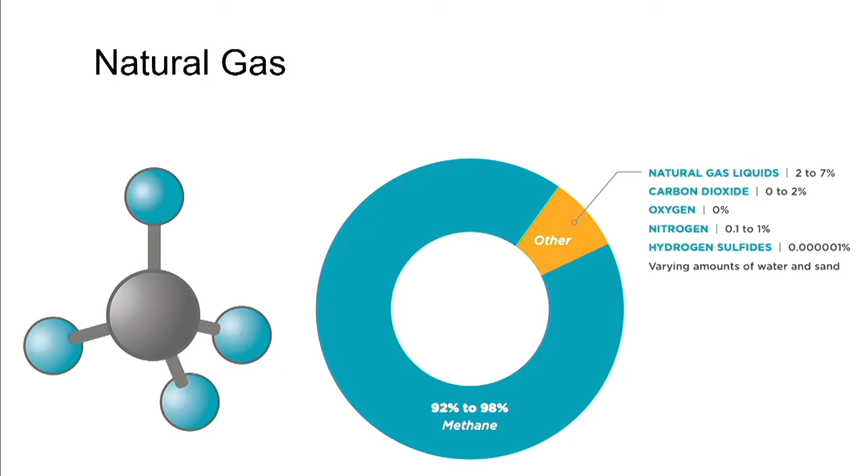So I want to talk to you about natural gas tonight. And increasingly, what I'm going to talk to you about is why building decarbonization is coming up now, and why gas is playing an increasingly important role in our conversation in California, and what are its implications for us as communities, and what we're going to be seeing coming down the pike as far as changes in the design of our communities and our energy systems.

So really, when we're talking about natural gas, the reason it's becoming more and more of a concern is that it's actually methane. Natural gas is made up of 92 to 98% methane. The rest of it is some other pollutants, some other additives, but ultimately what we're talking about is methane. And we're concerned about methane because methane is a super pollutant from a greenhouse gas perspective. 84 times more effective at capturing heat than CO2. So incredibly more effective than CO2 from a greenhouse gas perspective.

And the reason we're concerned about this is because California imports most of its natural gas. And we import it from states that have much different laws around air quality and water quality than what we have. And so anytime you have a leakage rate over 2% for natural gas, it completely negates any climate change benefit from using it as a fuel. Anytime you have a leakage rate over 3%, it doubles the climate change impact from that gas.

And so the Environmental Defense Fund hired the top infrared pilot company in the country, and they flew over 10,000 different well sites for the extraction of natural gas across the United States. And you're going to see some of the footage they filmed from the Barnett Shale in Texas, where we get about a quarter of our natural gas. And what you're going to see is something that looks like smoke coming out of storage tanks and extraction tanks. What this actually is, this is methane being released. Nick, it's all you.

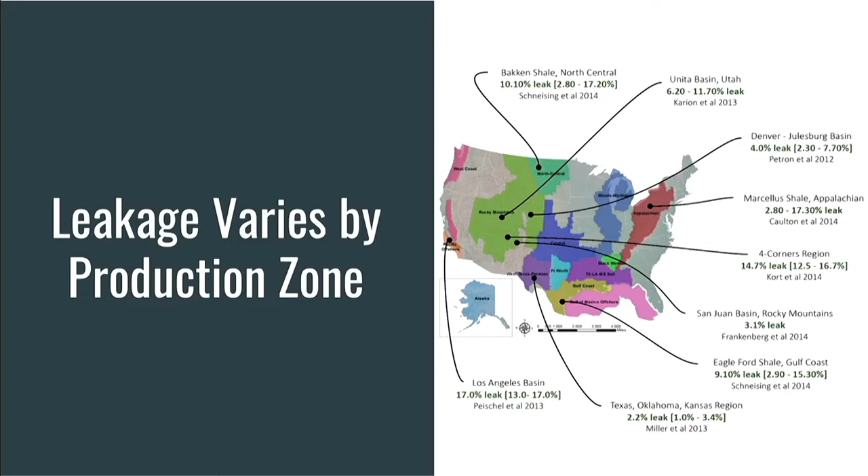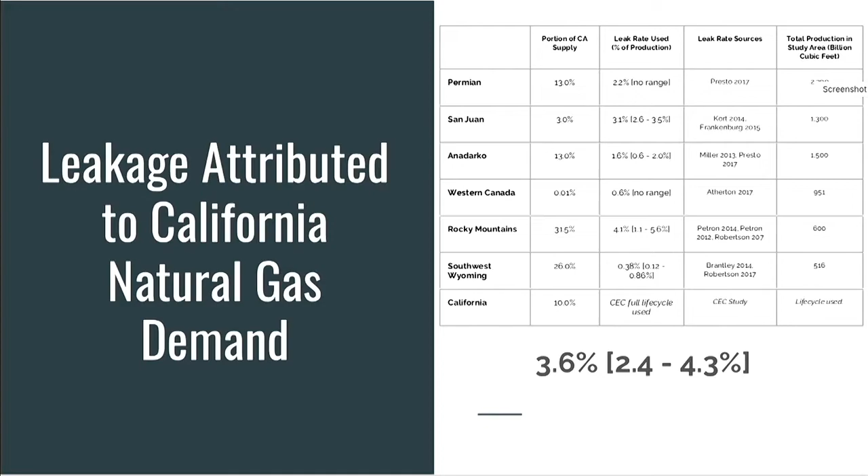Here is what it looks like from a California perspective. The first column on the left is all the different basins that California gets its natural gas from. The second column is what portion of California's supply comes from that basin. And then the average leakage rate as a percentage of overall production from that basin. Ultimately, the important thing is this. We have about a 3.6% leakage rate for the extraction and transmission to California for natural gas, meaning that not only does it have no climate benefit for its use compared to other fuels, but its impact is actually double due to the leakage of this fuel.

This is Jennifer. She works at Aclima. They're a fantastic company right down here in Silicon Valley, and that's a Google Street View car. And they put these air quality sensors in the back of Google Street View cars and drive them all over communities, making these beautiful maps of tragic information. And what they measure is different kinds of air quality pollution.

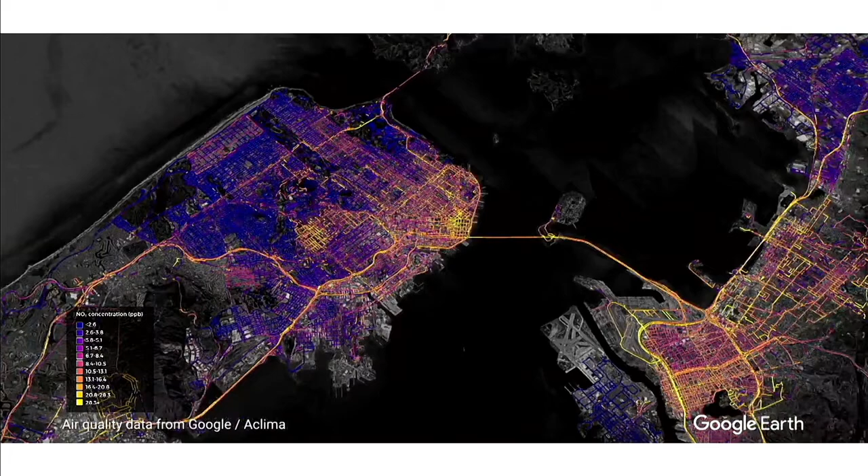And this is a map of transportation-related pollution, particularly nitrogen oxides in San Francisco, using these maps, driving around. I think this is about a year's worth of data that they captured, looking at different pollution levels. They also look at methane and methane release. So I talked a lot about where we get our methane from and how it gets over to us. We're starting to look more and more about the methane releases here in California.

And they drove around for about 6 months in Southern California. They picked 4 communities, and each one of these dots represents a leak in the gas system. And the little yellow dots mean it's the greenhouse gas equivalent of driving a car for 5,000 miles in one day. The orange dots are the equivalent of driving a car for 9,000 miles in one day. And the red dots, which is from here to India.

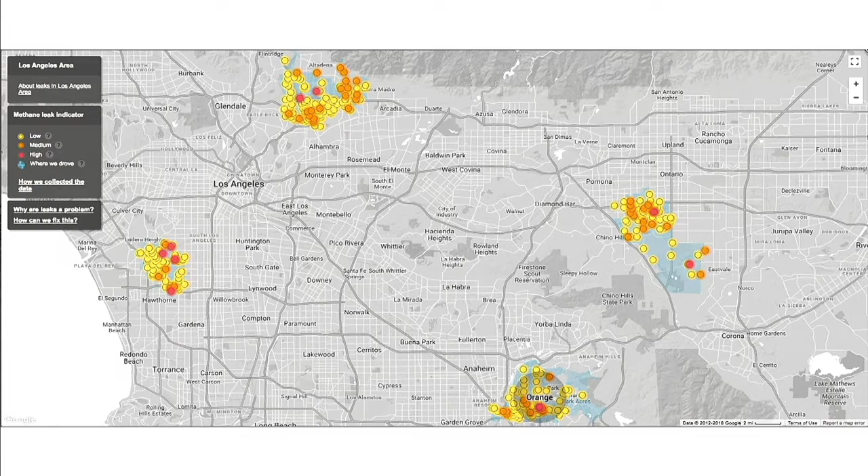And the orange and the red dots are over 9,000 miles in one day, and that can be a pretty significant disparity between each one of them. And so what we're finding is that we have some pretty bad leaks in our system. The California Public Utilities Commission says we have about a 0.5% leakage rate across California in our gas system. And then in our homes, we have about a 0.5% leakage rate. We live in little bubbles of methane in our homes on average, according to the California Energy Commission.

So combined about 1% in California, 3.6% from the transmission and extraction, we're upwards of 4% leakage rate from the extraction of gas into our lifestyles. Here's Boston, where they had those terrible explosions at the end of last year, about 40 miles north. Other communities with much older gas systems, this is a much bigger issue, with Boston being one of the main culprits for gas leaks.

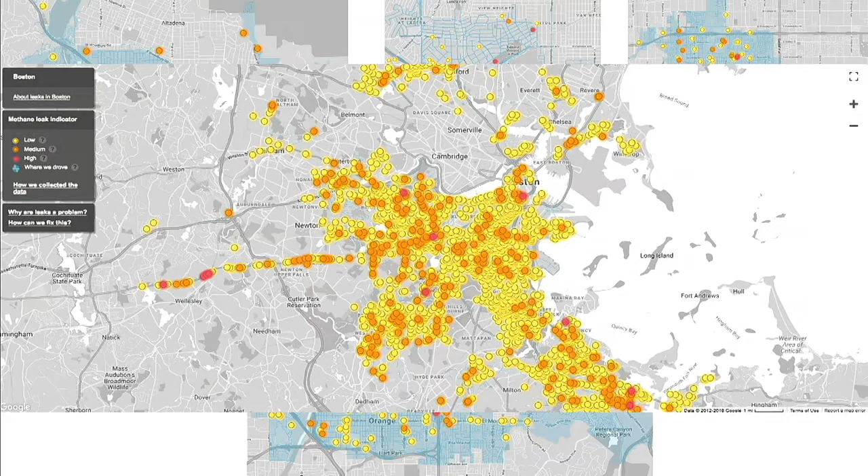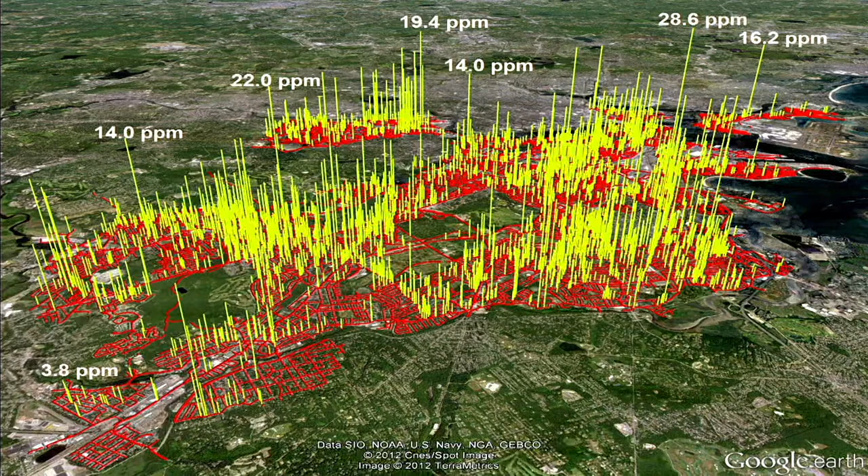Another way of looking at it, we're starting to see beautiful graphs like this, where each one of those yellow lines represents a leak, and the height of that line represents the rate of the leakage. This is Boston again. And so what we're finding is we live with an incredibly leaky system, leaking a super pollutant into the environment that's really exacerbating climate change.

If you want a really depressing Twitter follow, I highly recommend Gas Watchdog. It is a non-Russian bot that follows all of the public stories, all of the media articles about gas leaks around the world, and immediately pops it up. And it's depressing for the regularity of how many stories come up every single day about gas leaks across this country and across this world.

So you're going to hear a lot in this issue of decarbonization about choice. And I'm going to talk about one of the other choices to take beyond electrification. But I'm just going to go over some of the things you might want to consider when you're thinking about choice, when you're decarbonizing your building stock, electricity versus, say, something else. So in California, we basically use natural gas to heat our space, heat our water, heat our food, and 50% of us use it to heat our clothes as well.

So the choice we have is, instead of using natural gas, we use these increasingly renewable forms of electricity combined with really highly efficient technology like heat pumps that I'll talk about and induction stoves in order to heat our lifestyles instead. So here are some of the considerations.

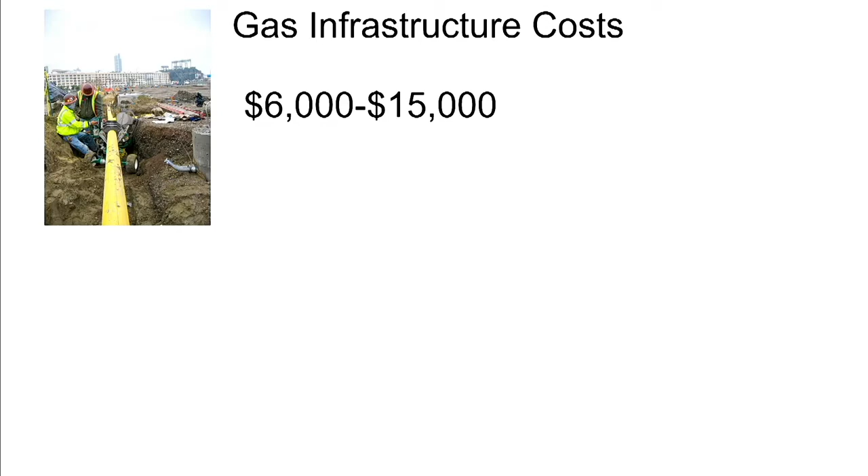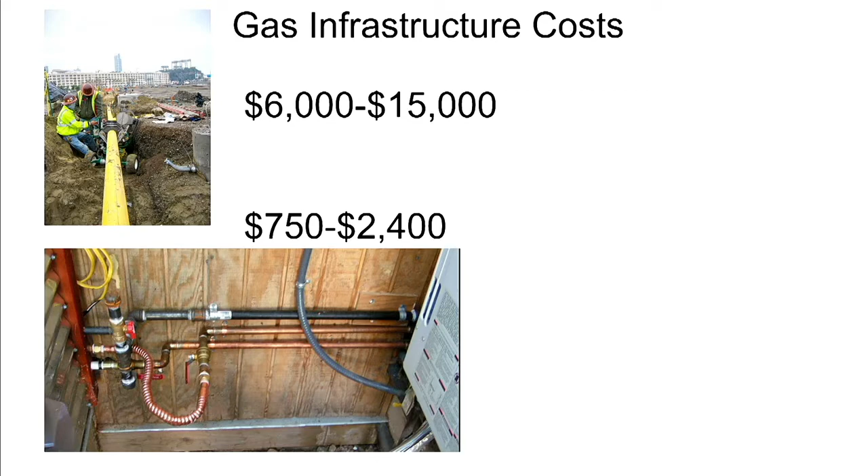Let's look at cost. When you look at the cost of putting gas infrastructure into a house, it costs between about $6,000 to $15,000 to bring the infrastructure in, to permit it, and for all the planning to be able to get it to a house. You look at the plumbing of what it takes to actually then plumb that gas through the house, anywhere from $750 to $2,400, depending on the size and the design.

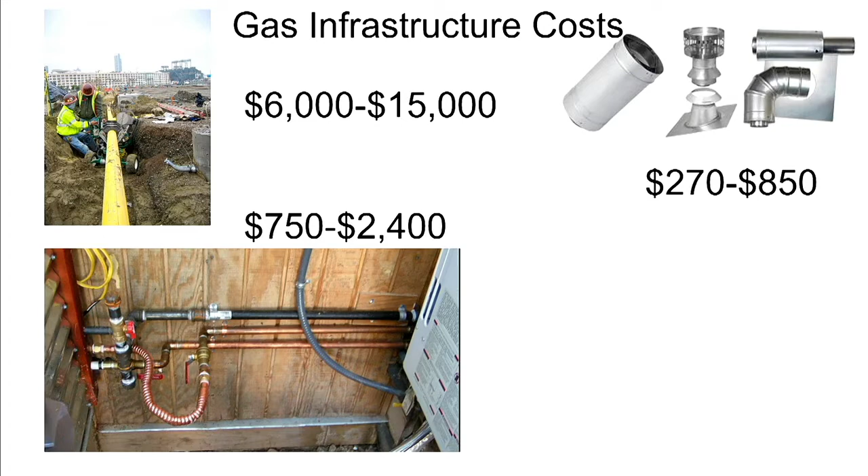And then the venting, because when you burn gas in your homes, it produces dangerous toxic gases that I'll talk about, and you need to vent it out by law, because we've recognized this, and it can cost just under $1,000 to vent it all out.

The National Association of Home Builders, the trade association of home builders in the United States, puts out a report every year called Priced Out, where they look at the impact of increased cost of homes on families' ability to afford to buy a home. They look at every state and 350 major metropolitan areas, and every year they put out a report.

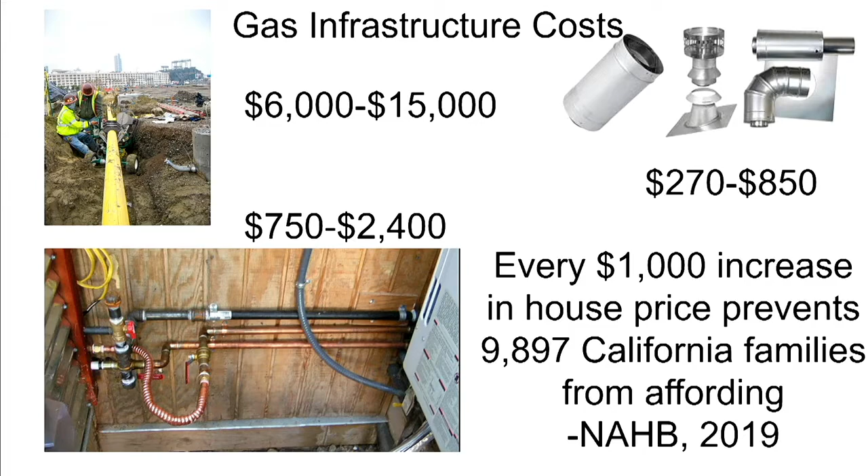And for 2019, they said for every $1,000 that you increase a house price in California, you're pricing out just under 10,000 families from being able to afford a house. So if we're choosing to put in gas, and it is a choice because we can do it all electric, then what does that impact on a community and in a state that's living in a housing crisis?

Say we use the low end of those costs, about $7,000 per home, almost 10,000 families per $1,000 priced out. We're talking about pricing almost 70,000 families out of the ability to buy a home in California because we've chosen to put in gas rather than electric. We're all going to have electric anyway. We're choosing to put in gas to our homes.

So you might ask, well, this electric technology and the appliances, do they cost more? Absolutely not. California's trade association for home builders, the California Building Industry Association, put out a report last year that says these all-electric appliances cost the same or cheaper than gas appliances to heat your space, to heat your water, to cook your food. And the home builders here are saying that you can reduce greenhouse gas emissions by 50 to 60% for new homes building with the current grid renewable energy supply.

If you want to ask about non-residential buildings, an organization called Point Energy did a report for the UC Office of the President. The University of California has adopted a carbon neutral policy across their entire 10 campuses. By 2025, they're going to be completely carbon neutral is what they're shooting for. And so Point Energy, a big engineering firm up in San Francisco, did a study about what it costs to build all electric compared to gas, and what it costs to operate it.

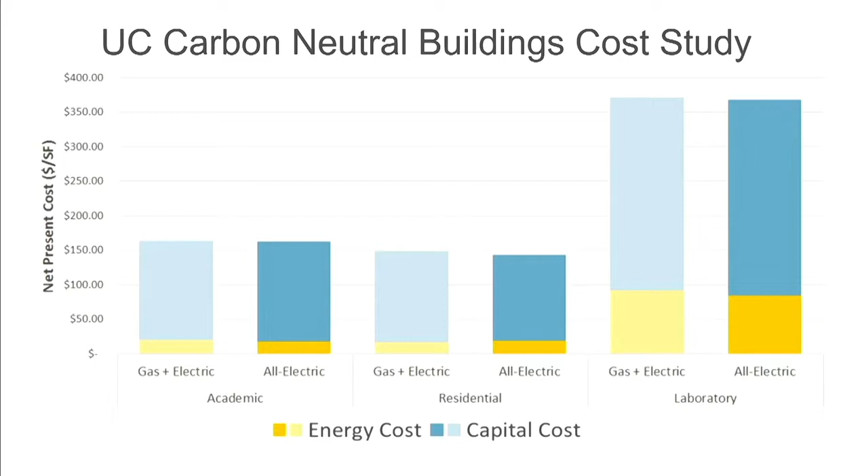And this starts to play into equity as well. Here in California, 15% of our families live in energy poverty, meaning they spend more than 20% of their income on utility bills. Utility bills are the #1 reason for payday loans in California and across the nation. And so the ability of a family to manage their expenses is incredibly important to be able to keep above the line and be able to pay off everything else within their lifestyle and their families.

And increasingly, we're finding that natural gas is not a good partner in the ability to manage costs. This is the price of gas in California from April 2018 until April of this year, over the last year. And what you can see is a completely unreliable price for a commodity that's critical for over 90% of our families in California that rely on gas for heating. You cannot plan for those kind of price swings within your monthly budget. And what are you having to cut when you're having to pay these increased costs that we have no control over?

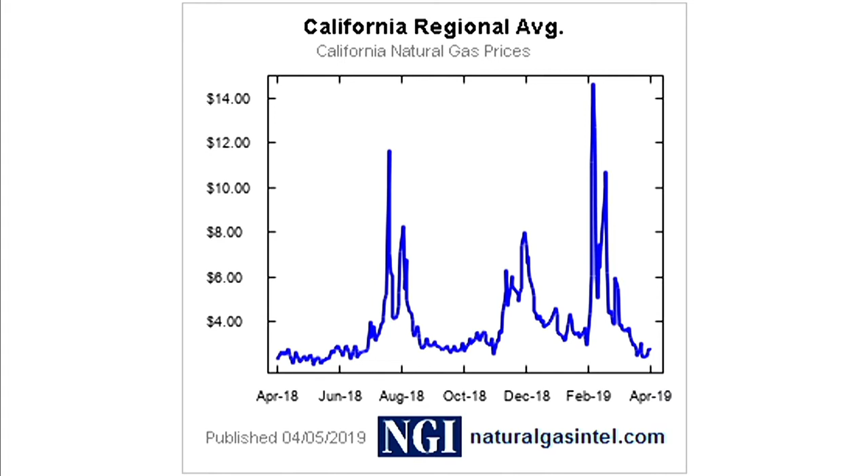What happened in February and March of this year in the rest of the country? Polar vortex. You saw where we get our natural gas from. We compete for that same natural gas with those other communities. Last year was a record year for natural gas use until this year, which is a record year for natural gas use, largely because of events like that. And we'll be increasingly competing in a reality of climate change. They're about to be hit by a bomb cyclone this week across the Midwest. They're talking about 20 to 30 inches of snow in North Dakota and Minnesota this week in the middle of April. We're going to be increasingly competing for this same natural gas and paying these high prices in the future.

Southern California Gas Company is asking for a 45% increase in their gas prices over the next 3 years. And remember, they don't produce much of their own natural gas. This is for being able to actually maintain this system at a safe level for California with our new understanding of just how leaky our systems are. And so increasingly, these high prices are going to be going even higher.

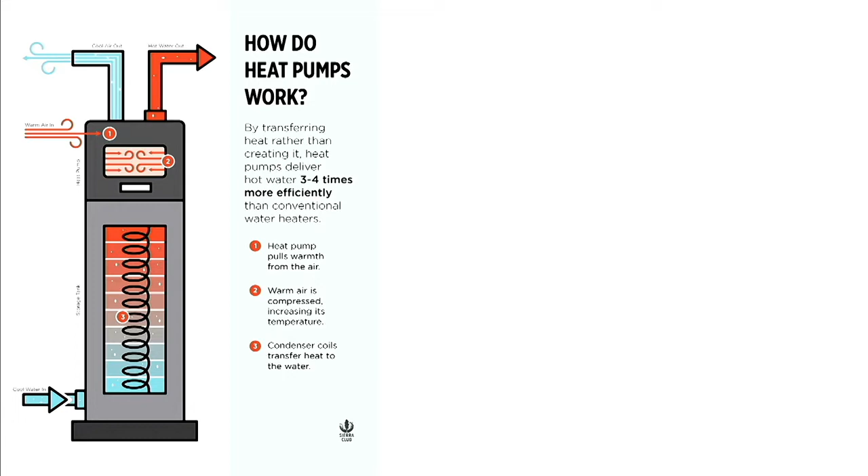And heat pump technology helps with that. How many of you use heat pump technology in your house? How many of you have a refrigerator in your house? That's heat pump technology. Not the same thing, but it's basically the same thing. It's using a condenser and refrigerant to be able to move heat from one space to another. For a refrigerator, you're taking heat outside of the inside of that box. You put your hand on the back of that box, and there's heat coming off of the back of it going into your kitchen or wherever you keep your refrigerator. It's the same thing with heat pumps. You can use that same technology to heat water or to cool or heat space, depending what you want.

The beauty of heat pumps, they're 4 to 5 times more efficient than the best gas appliance you can buy for the same purpose, and they're grid interactive. Meaning when we have a ton of solar during the middle of the day in California, you can preheat your water or pre-cool or heat your house to be ready when you come home and not have to do it at peak when the energy is the dirtiest and the most expensive.

So health is increasingly becoming more of a concern with natural gas. Nitrous oxides are a toxic gas. They can cause asthma at high levels in otherwise healthy adults. And for people with asthma, it's one of the leading triggers of asthma attacks and one of the leading contributors to smog. In California, we have air basins like the LA Air Basin and the San Joaquin Valley that have never been in compliance with the Clean Air Act in the history of the Clean Air Act. 1 in 7 California children have asthma. 1 in 6 in the Central Valley suffer from asthma.

In California, our power plants have done a really great job about controlling this toxic gas. They only emit about 18 tons a day of nitrous oxides. The combustion of gas in our buildings leads to the emissions of 6 times that amount of nitrous oxides within our communities. We do not have good pollution controls on the appliances in our house like we do on our power plants. You might ask about cars. The entire fleet of cars comes in just barely more than our buildings from a nitrous oxide pollution standpoint. Freight, much higher and a really big problem, but buildings are increasingly one that we can much more effectively and economically manage than some of these other sectors.

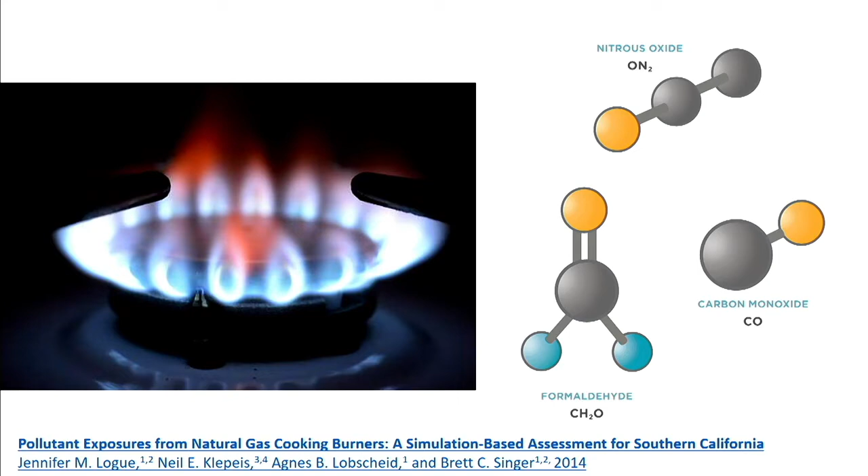Dr. Singer said, if these kind of levels of pollution were found outside, there would be criminal proceedings against the source of this pollution. But because these are inside people's homes, there's nothing we can do about it. I already talked about nitrous oxides, carbon monoxide. There's a reason why we have the carbon monoxide alarms required in everybody's homes ever since the Carbon Monoxide Poisoning Prevention Act of 2010 in California, because it tells you that you need to air out your house because there's a poisonous gas that's about to kill your family or your pets.

And then formaldehyde, the leading cause of childhood and pet leukemia. 1 in 3 children that get childhood leukemia die from it. About half the pets that get pet leukemia die from it. And formaldehyde is a leading cause of that.

The Air Resources Board has already produced some information about the dangers of cooking with gas. They focus on chicken. I don't think it's only chicken. But they talk about how cooking with gas will exceed allowable levels of air quality. And they have a pretty, I think, pretty funny set of recommendations about what to do about it. They say, have your gas stove maintained by a professional every year. Who has their gas stove maintained by a professional every year?

Anybody? No. They say, I really love number 3, use heat-proof side shields along with an exhaust hood. So all of you have your little side shields at home up on your gas stove. Anybody cook in a laboratory for home? And then my favorite is the very last one. Consider microwaving food when possible. Just forget about it. Thank you, Air Board, for the help.

But even this one right here, self-cleaning. One of the leading causes of formaldehyde is the self-cleaning mode. So, and I like this one, self-cleaning, leave. Just leave and well ventilate for the first hour or 2. This is from our Air Board.

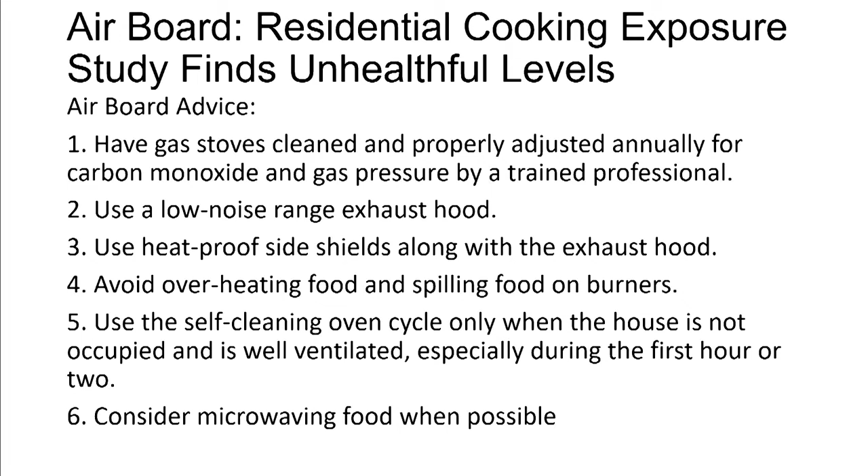The reason cooks love it are 2 main reasons. Power. Significantly more powerful than gas. It can boil a pot of water in half the time of a gas range. And control. Amazing control. High levels of control, low levels of control. How many of you can cook chocolate in a single pan? Many of you, if you cook chocolate, you have to actually cook chocolate in a double pan.

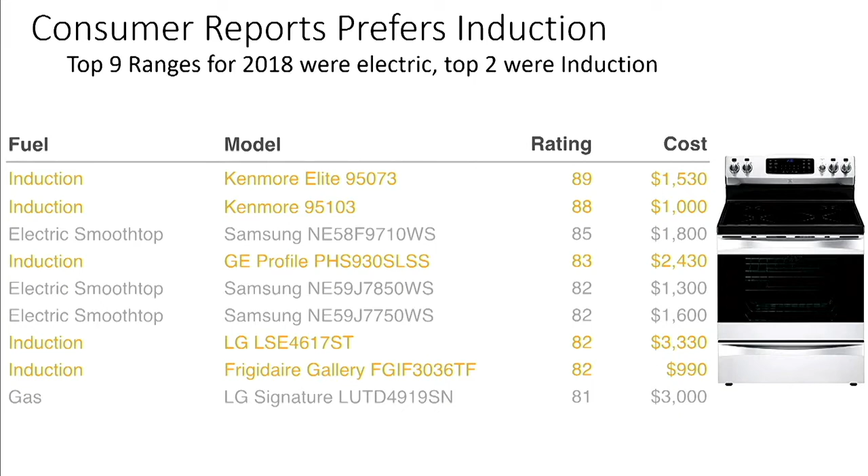My community cooks with a lot of woks. Don't worry, wok-shaped induction stoves. Can you do tortillas on it? Absolutely can cook tortillas on it, and it's the best pozole you'll ever cook in your life. Because of the amazing control, you're able to keep it at a low temperature that it needs in order to be able to simmer and fully pull out all of the flavors from all the different ingredients to make the best stew of your life.

Studies have shown, though, that humans like the fire. So Samsung has produced a model that has a false flame that wraps around the front of the pan to be able to give you that feeling of fire in there.

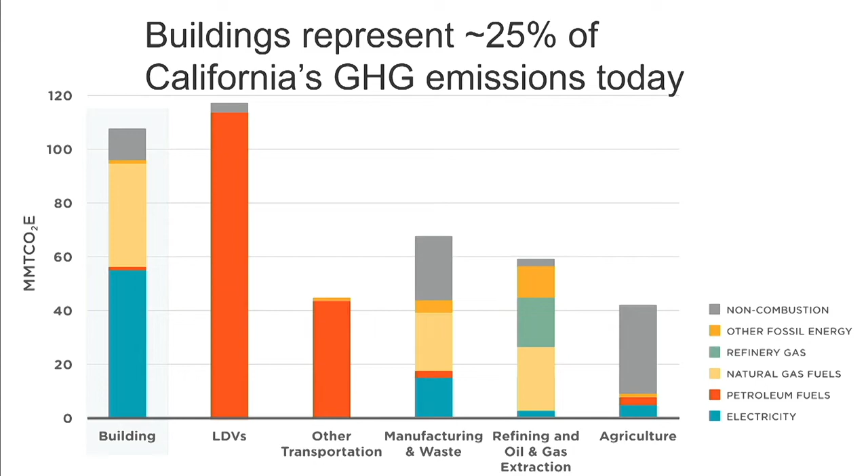And what we're finding is that buildings are the second largest contributor to greenhouse gas emissions from an end use perspective. This is the electricity used, this is natural gas, and this is refrigerants escaping from our air conditioning systems. So buildings are going to be an incredibly important part if we're able to avoid catastrophic climate change.

What big innovation happened in 2015 in transportation? Rideshare. During the week, about 8% increased VMT from rideshare from idling, and during weekends, about 10% increase. I do rideshare, I'm not demonizing rideshare, but we're going to have to address it because it's starting to have a pretty significant effect on our climate change planning as well as our transportation systems.

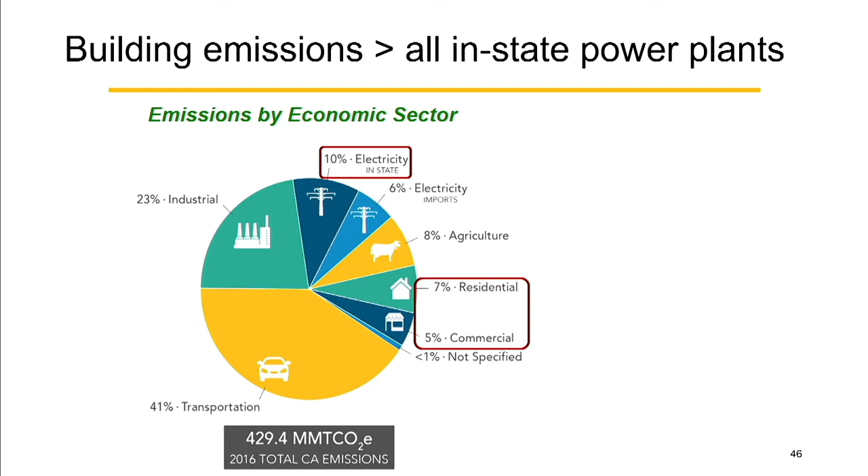If you look at it from the actual burning of fuel, you have our in-state electricity. The power plants here in California produce about 10% of all of our greenhouse gas emissions. You combine residential and commercial, it's about 12%. So our buildings are producing more greenhouse gas emissions than our entire fleet of power plants in California, and more criteria pollutants.

So as we move towards trying to lower our greenhouse gas emissions, here's really our choices. We're going to be getting to, by law, zero carbon electricity by 2045 in California. If we do that and do nothing on gas, these are greenhouse gas emissions from the building stock; we're still going to have gas creating greenhouse gas emissions. Or we could be switching over to all electric buildings and completely zeroing out greenhouse gas emissions from the built environment.

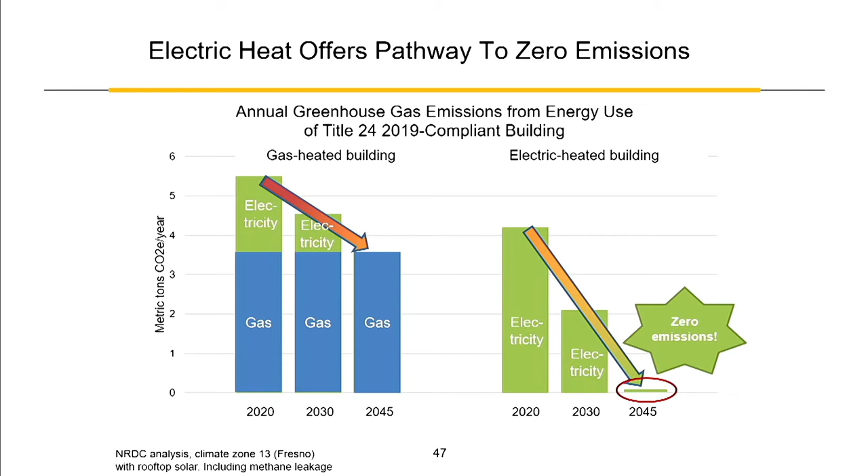The beauty here is that in the time frame we're talking about, 2045, we're probably not going to have to force people to make a lot of tough decisions, because your stuff breaks. Your water heater breaks every 8 to 12 years. Your furnace breaks about every 15 to 20 years. Over the time frame to avoid catastrophic climate change, your stuff's going to break.

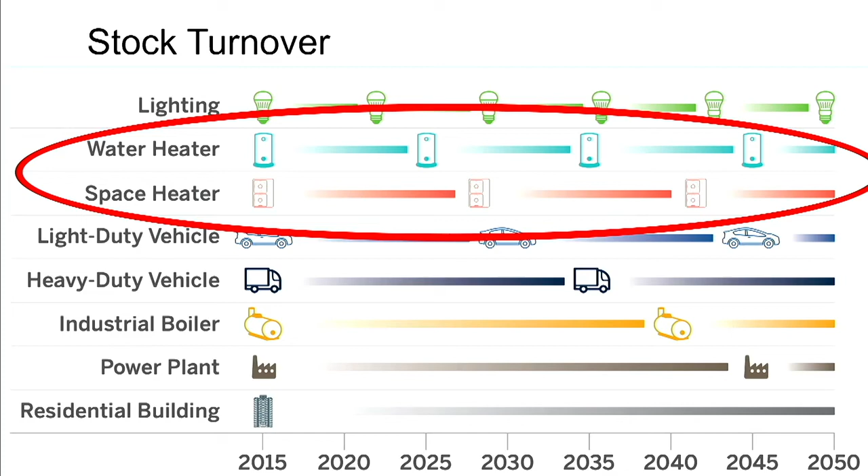And it's going to be about how Silicon Valley Clean Energy can create the right market conditions to help you make better decisions around purchasing all electric appliances to run off of their clean electricity rather than natural gas appliances, which are crippling our climate change fight.

Now, here's that other choice, biogas. You're going to hear a lot about it. Biogas, biomethane, renewable natural gas. Here's the reality on this. This comes from dairies and landfills, using woody waste and agricultural waste to create gas that we then pump into our pipelines.

So in 2015 in California, combining all of our buildings and industry, we used about 1.6 quadrillion BTUs of natural gas. If we achieved unimaginable levels of energy efficiency, levels we've never achieved in California, and had business as usual growth out to 2050, we're looking at still about 1 quadrillion BTUs of demand for natural gas.

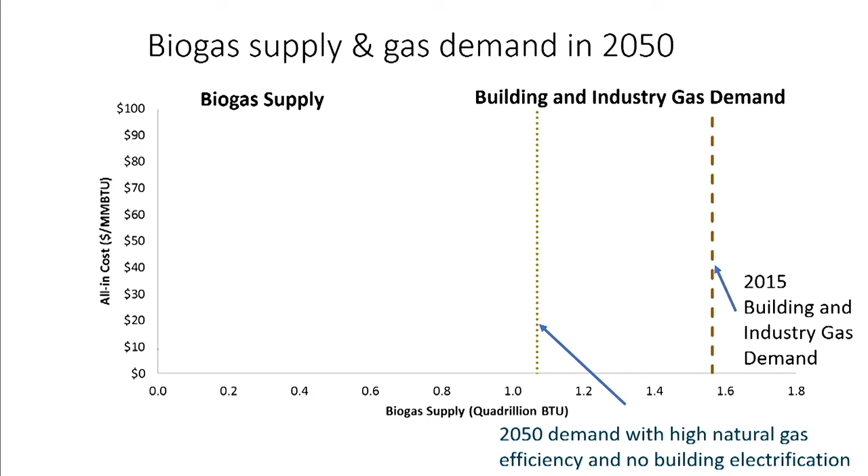Even with unimaginable levels of energy efficiency, there's always going to be a gap between what biogas can provide and what we need here in California, even under the rosiest scenarios. Having a reliance on biogas means a reliance into the future of fossil natural gas. It's a false promise for a climate change future, and at prices that are just completely unacceptable to any ratepayer or politician.

Current biogas prices at about $10. You saw we pay about $6 a million BTU right now. We're talking about prices of $30 to $100 for that instead. Completely unaffordable solution, and really a unicorn from the gas industry.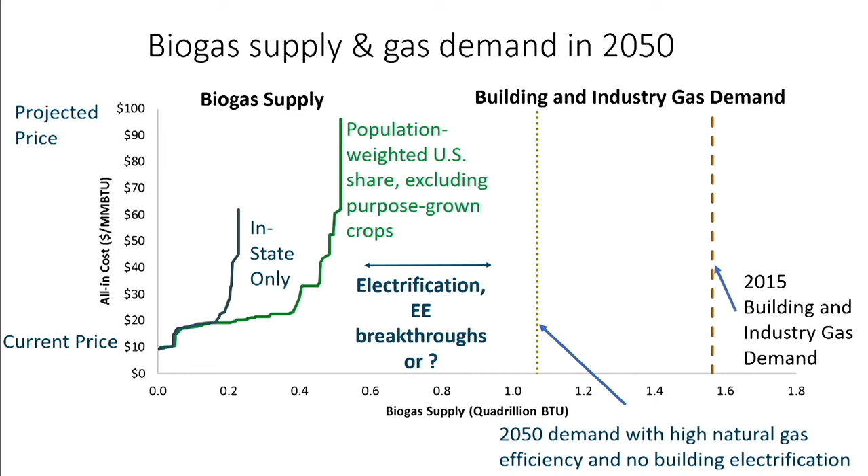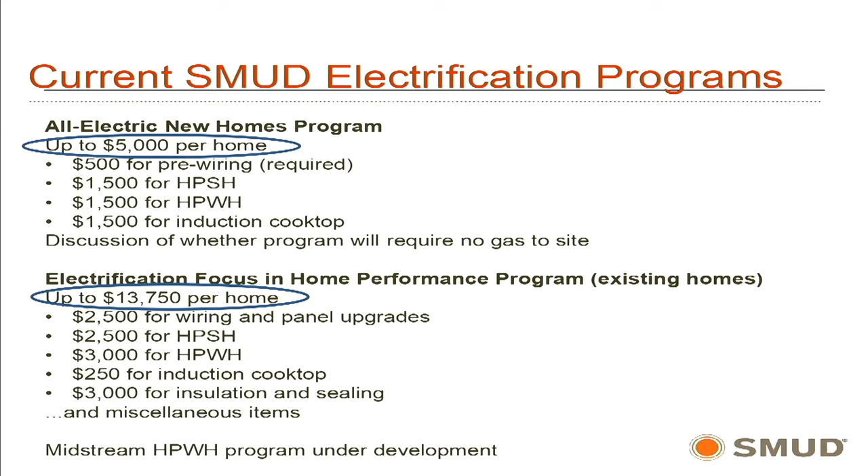So you're going to start to see more and more programs like this. No pressure, Amy, on this one. Sacramento Municipal Utility District, they're giving $5,000 per home to go build all electric, almost $14,000 per home to renovate your home. Appliance by appliance, or if you do everything, they'll give you an extra kicker plus some energy efficiency on top of it. You're going to see more and more programs like this.

The Public Utilities Commission is moving towards financing, incentives, and market transformation around this. And they have officially announced that they're going to be moving their $1 billion a year of energy efficiency money away from a focus only on energy efficiency savings and over to also a greenhouse gas savings focus, which is going to be encouraging electrification of buildings.

The Energy Commission got a lot of attention for requiring solar in the new building code. In the next building code, they're going to be incorporating greenhouse gas emissions into the building code like we've never seen before, and starting to require measures that are going to be encouraging electrification of buildings. And then right here in Silicon Valley and across California, we have about 40 different communities that are considering adopting mandatory codes to require building decarbonization across the state.

On Friday, LA County announced that by 2021, they'll adopt across the entirety of LA County a mandatory building decarbonization code. And next week, Mayor Garcetti in LA will announce the same thing for the city of LA, a mandatory code by 2021 for new construction and existing buildings. Sacramento, San Francisco, San Jose, Oakland, maybe some in this room, going to be making similar announcements as we work towards building decarbonization codes across the state.

So to sum up, electric buildings: cheaper, more equitable for our communities, healthier, more climate friendly, and safer. There's not a good reason to be building with gas right now for any of these reasons. And that's why we're seeing more and more of these. The Tesla Design Center and SpaceX, all electric. Here's Elon's chef, Ted Cizma, head chef at SpaceX with their all electric staff cafeteria.

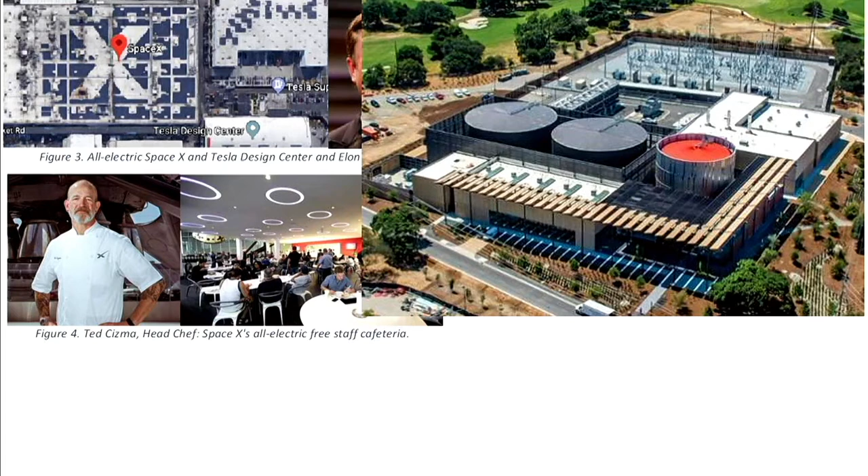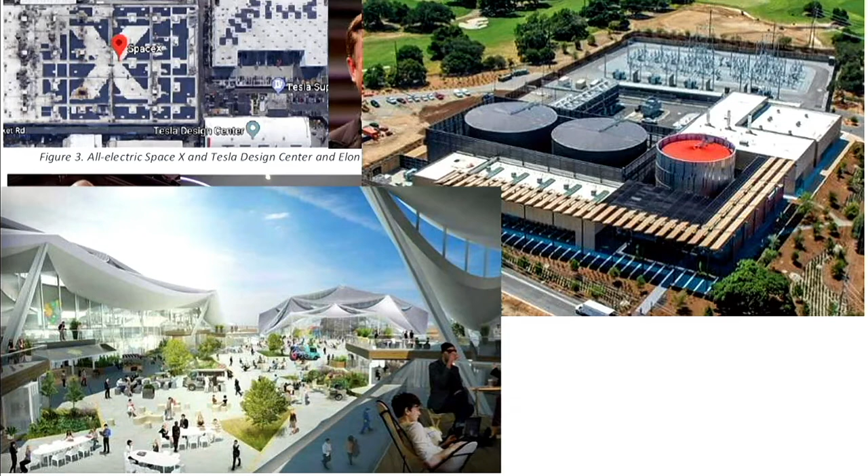Stanford alums, Stanford will be completely carbon neutral by the end of 2019. This is their central plant. They're completely switching over. The new Google headquarters, the largest geothermal heat pump system in the country. And then the Exploratorium in San Francisco, completely all electric, tons of solar, carbon neutral. The International Bradley Terminal in Los Angeles, 29 food vendors, all electric. And then the Packard headquarters, another example. There's some beautiful examples of all electric buildings already built, already operating. You don't hear about them just because they're buildings. Why talk about them?

Think of how much this one technology of the smartphone has completely changed our culture and our society. What we're talking about is something that you don't even care about. Your heater, your water heater. That's the majority of what we're talking about here. You don't care about that right now. We can make those changes much easier than the changes I just talked to you about. So I come from a community that has suffered from climate change. I live up in Sonoma County.